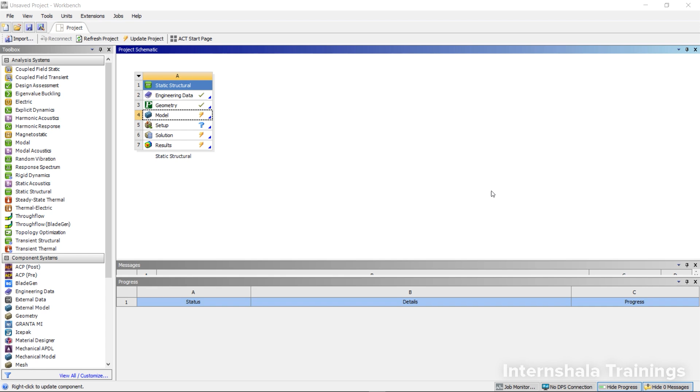In this lecture, we are going to see a few things about how to check the mesh quality in two different ways, and what is target meshing, like target quality and other things. Okay, for that I already have opened ANSYS Workbench. I already loaded in the model that I have provided you in the resources tab. So already I double clicked on the model cell and I was able to open ANSYS Mechanical.

Fine. So here once I open ANSYS Mechanical, what I will be doing is I will be generating the mesh with the default settings, and I will say generate mesh. And once I generate the mesh, the first thing is you can go to the statistics, and if you expand the statistics, you will be able to see how many nodes and how many elements have been created. So here a total of 816 elements have been created, and a total of 4557 nodes were created for this object through automatic meshing.

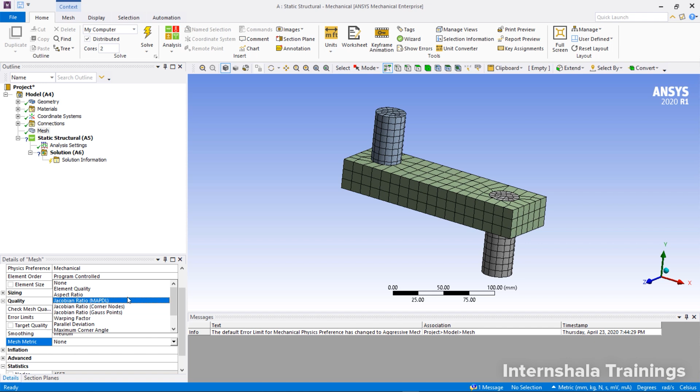So if you go for the quality option, you can check for different qualities here. One thing is if you go to this mesh metric and you select different options like element quality, aspect ratio, Jacobian ratio and other things, you can see what are all the qualities of each and every element. See, for example, if I have selected aspect ratio, here I will be able to see this many elements are having an aspect ratio which is nearer to 1.11.

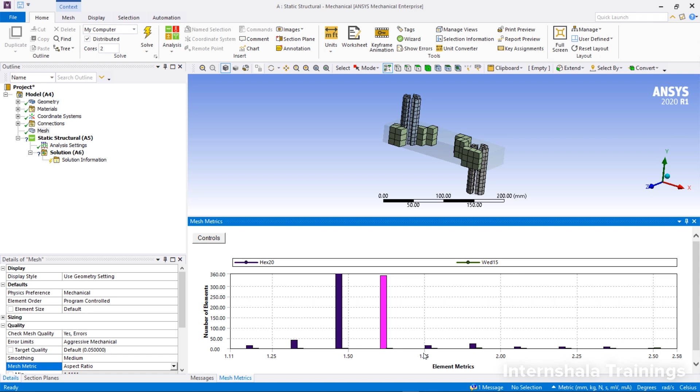Likewise, if I select here, all these elements are having an aspect ratio which is nearer to 1.50, and if I select here, I will be able to see that these are the elements which are having an aspect ratio very near to 1.75. Likewise, you click on the histogram chart, you will be able to see all the highlighted elements on the graphics window. Whatever mesh metric you select, you will be able to understand that particular thing.

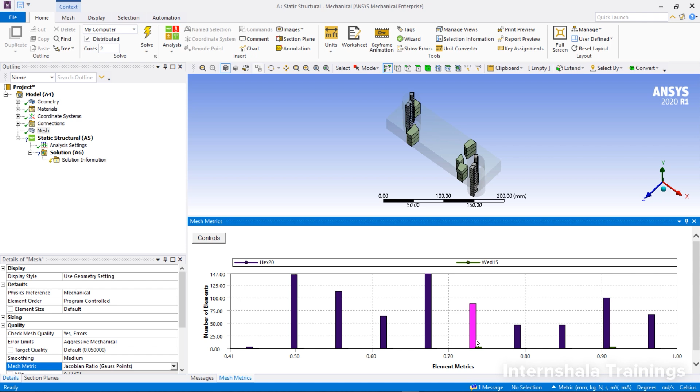Let us say if I go for the Jacobian ratio, see here, if I select this, these are all the elements which are having a Jacobian ratio near to 0.7, somewhere between 0.65 and 0.7. So based on this, you can filter out elements, you can identify elements which are having a lot of deviation from the required values, and you can change the mesh with all the localized and globalized settings that I have previously shown.

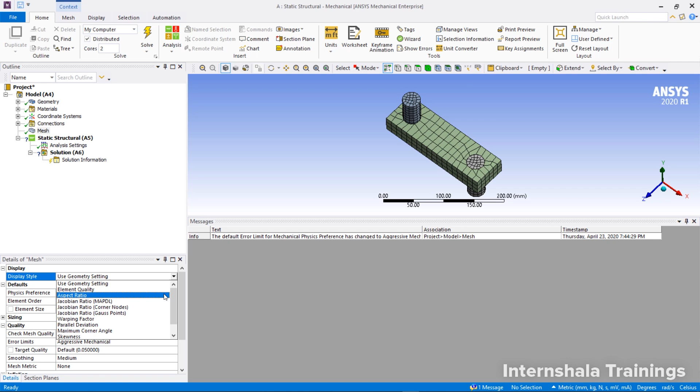So you can view all these elements like this, or otherwise just switch off all these things by selecting none, and now go to the display style. In the display style, instead of using geometry settings, select whatever mesh metric you want to see. Let us say if I want to watch aspect ratio, I will click here, and once I select the aspect ratio, you are able to get a contour plot in the graphics window showing all the elements and their aspect ratios. For example, all these elements in dark blue color have an aspect ratio of 1.1 to 1.27.

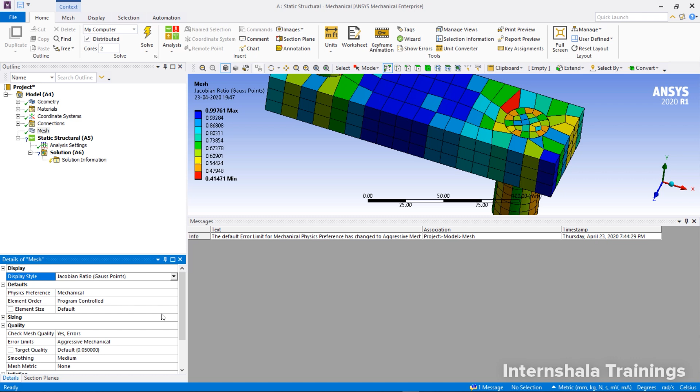Likewise, you can select any of the mesh metrics and you will be able to see a contour plot. What I will do is I will just minimize it so that I will have a good looking view, and I can select the element quality and other things. The next thing we need to look at is the element quality, and if you come down here in the quality group, you will be able to see there is something called error limits.

Here you will have two algorithms. One is the standard mechanical algorithm and the second one is the aggressive mechanical algorithm. Based on the algorithm you select, it will specify an error limit for itself, and remember, this error limit value you cannot change.

Based on the type of algorithm you select, it will change that. If you go for aggressive mechanical, it will have more strict error limits. If you go for standard mechanical, it will have somewhat relaxed error limits.

So based on that, once we tell the software to generate a mesh, it will generate a mesh. Then it will check the qualities, element qualities of all the elements present in that mesh, and see whether they are below the error limit or not. If all of these elements are below the error limit, then it will show the generated mesh.

Otherwise, if some of the elements are above the error limit, what it will do anyway, by default the option is adaptive sizing on, so it will try to change the size and some settings, tweak some settings, and regenerate the entire mesh.

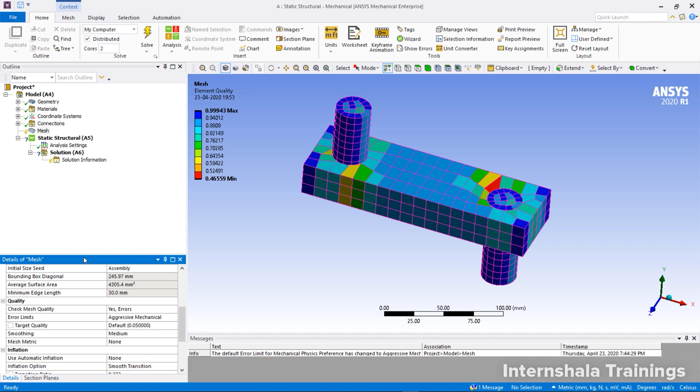Okay, so with this I am going to conclude this section on meshing. Thank you.